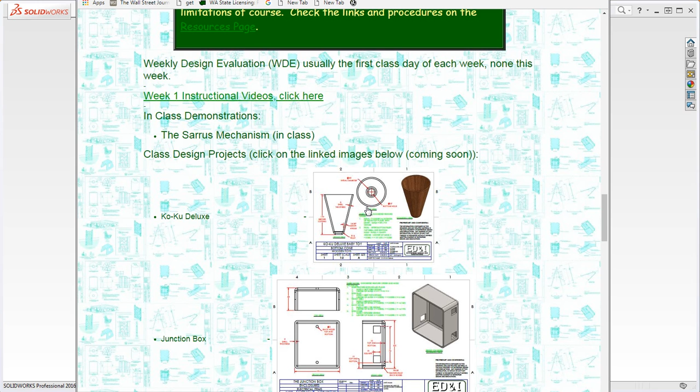Okay, so in these videos I'm going to show you how to put together some of these drawings that are available in the week 1 section of the website. So as you know, all you have to do is click on the image that represents that drawing. It's going to bring up the drawing in PDF format.

Nice thing about having the dual monitors in HT120 is it gives you the capacity to look at the drawing on one side and be able to model on the other side. It's going to be real convenient for you. So one thing you want to do with these drawings, and keep this in mind because later in the quarter you're going to be creating drawings like this, is you want to make sure it's readable and understandable and it's got all the appropriate information in there. You're going to need to have somebody build this, or in this situation, to model it.

So go ahead and read the drawing. You have the name of whatever the part's going to be. That's going to be important, and maybe some secondary names, and then maybe broad categories in here too. So we have a Ko-Ku Deluxe Baby toy in here, which is the cone. It's going to be the bottom cone. There's going to be some fun stuff that's going to go inside of that, but we're just worried about the cone right now. And sheet scale is down here too.

Sheet size is A size, but typically in the lab we're going to be creating B size paper. Tabloid size drawings, which is half size D size, which is typical engineering sizes, which is going to be 34 by 22. So we're about quarter size here in regard to paper size, but the scale is going to be 1 to 2. So kind of look this over, think about what you need to do.

What we're going to be starting with is going to be a simple cylinder that we're going to be putting a draft on in order to provide that angle to make a cone out of it. So look for that information you're going to need to start with. You're going to read this through and kind of look at things. Sheet notes are always going to be green. The text is going to be red.

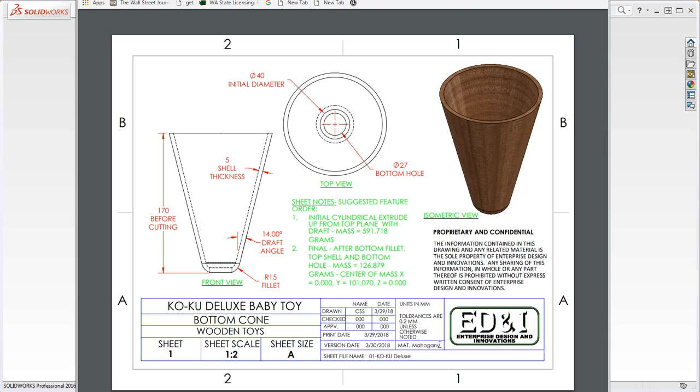Other things you're going to need to know, you're going to have to dig out of the title block. So you want to make sure you understand the units, which are in millimeters, so you're going to look at that over here. Drawn by, that's something that would come later. We'll talk about that later. Print date, version date, stuff like that. Material, this is something you're going to need to note here too. You want to make sure you put the proper material in there, otherwise you're not going to get the right weight. So we're going to put this off to the side.

We're going to begin to model it. We're going to go ahead and go to open, and we're going to go to our SolidWorks template files. So I'm going to go in here and go into the appropriate class section that we're going to be using. And we want to make sure that when we go to the class design, you have your template files in here. You're going to choose the appropriate one. So I'm going to be using not inch pound second, but millimeter gram second, ANSI-B. Not drawing, but we want to look for the part over here, which is going to be this guy down here.

So part-MMGS, we're going to go ahead and click on that and open that up. So now we have all the settings in here that we want.

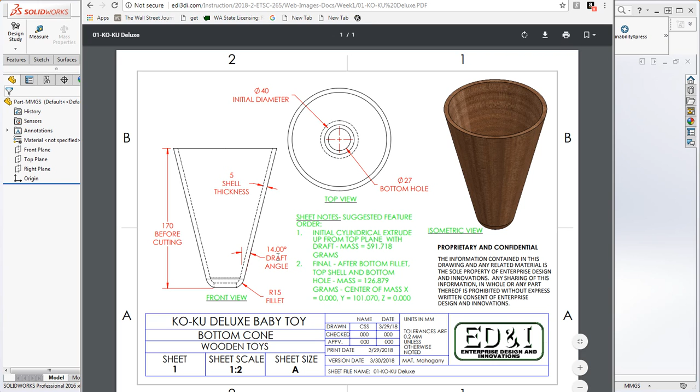We just need to begin to draw. You got to think about this and read your notes. Initial cylindrical extrude up from the top plane. So we're going to sketch in the top plane, with an initial diameter of 40 millimeters with a draft angle of 14 degrees at 170 millimeters.

So let's pull that aside. Start with the top plane. Go to sketch, go to circle. When you do that, it's going to correct itself and make itself parallel to the screen. I'm going to sketch a circle out here, and you'll notice there's a value next to the cursor. You don't have to worry about that right now, but we're going to put a dimension on there by selecting Smart Dimension up here, drop that in an arbitrary location and give it a specific value.

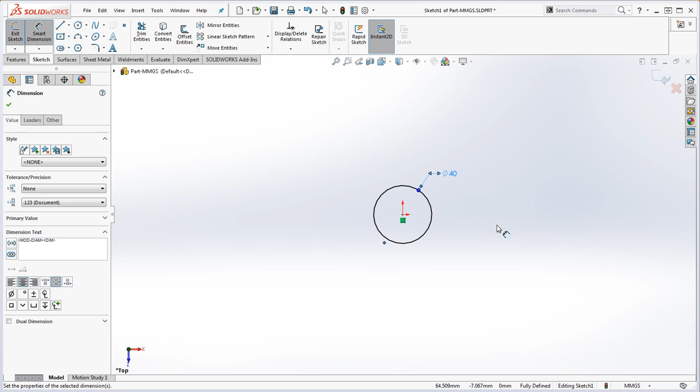Now you notice it's black. It's fully defined. Don't need to do anything further with it. And do not do this like you did in AutoCAD. Don't take that dimension and delete it, because now that circle has the capacity to move around. You don't want to do that. You're going to get some errors. So Control-Z a couple times, and now we have that initial diameter.

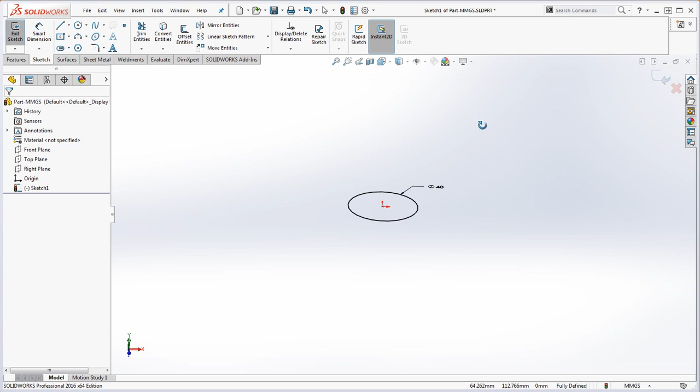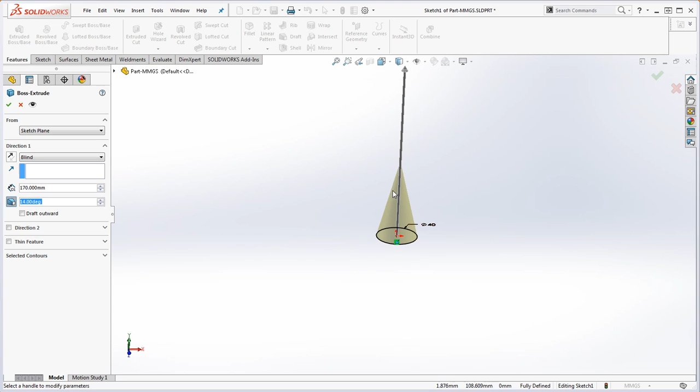So now we're going to go ahead and do an extrude. Extrude boss base, Properties Manager pops open. We're going to make that 170 millimeters, so it's going to go way, way up. Now we have a draft angle, so this is where the draft angle comes in. It's this option over here. We're going to click on that and make that 14 degrees. We did this in class, remember, kind of had a small little cone in here, but we can select draft outward and go to the green check mark. Now we have that in place.

So that's not really quite the look that we want. We want to define the material. So we're going to right click on that material, go to Edit Material. We probably should have done that first — we'll do that first next time. Because typically what you do in a Properties Manager or a Feature Manager, you start from the top, work your way down to the bottom, and if you do that, you should be able to cover everything. So we're going to be looking for woods down here. There's woods. Select Mahogany, Apply, and Close. Now we have that in place.

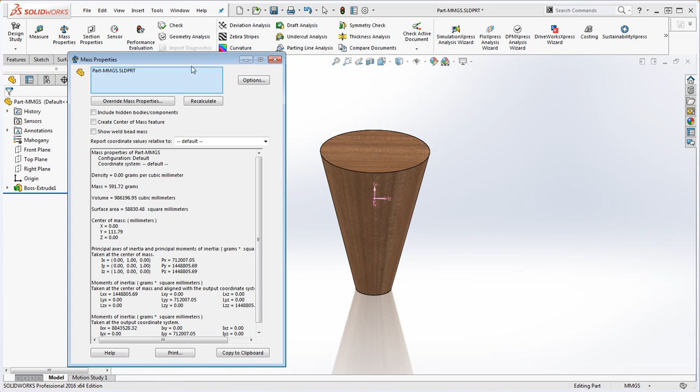So just to double check our mass properties, you want to go up here to the Evaluate tab in the Command Manager, go to Mass Properties, go to Options, Custom Settings. We want to make sure we're out to 3 decimals, and take that toggle, move that up to the highest level. That's important to do. If you have it down at the lower level, it doesn't calculate it as precisely. You're not going to get the same numbers that I got. So 3 decimal places, toggle up to the highest, go to OK, and then look at the values you have over here.

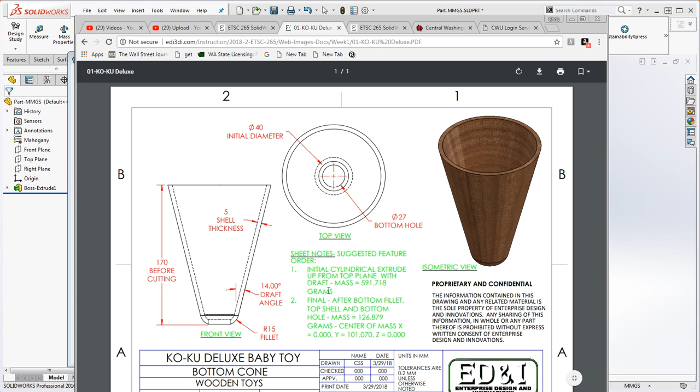591.718 grams. And according to our drawing over here, 591.718 grams. If you get that, you're all set. You're ready to go. Go to the next one.

So let's close that. Let's go to our fillet, and let's take a look at our drawing in regard to the fillet. Fillet radius is right down here. R implies radius; the diameter symbol implies diameter. It's easy to get tripped up on those. So if it's not quite a full circle, SolidWorks is always going to think radius. If it's a full circle, it's always going to think diameter. So keep that in mind, and just make sure you're watching this. That's going to be a test question. So remember, diameter is for anything circular that comes out — SolidWorks is going to label that as a diameter.

I'm going to write this down. And anything that is not quite a circle — an arc, not a circle — it's going to consider that a radius. And we'll put that as a test question. You'll see that on Monday.

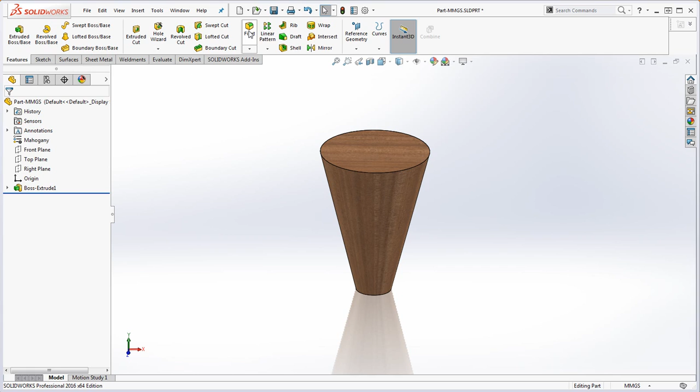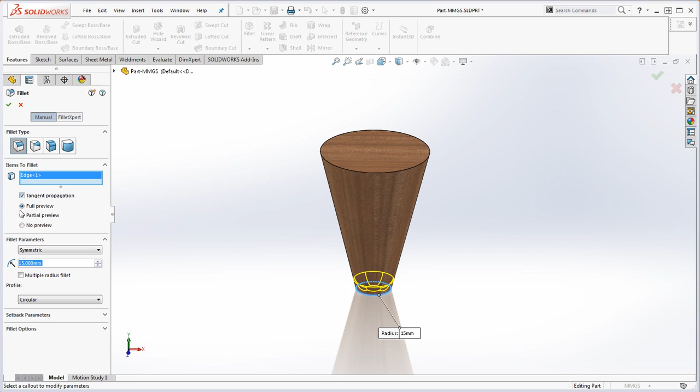Okay, so we're going to be looking for that radius on the bottom. It's going to be 15 millimeters. We're going to select the outside edge. Here's what you do: you go to the Features tab up here, go over here to Fillet. And Items to Fillet — we're not going to fill that in yet, but we're going to put in the value down here for fillet parameters. We're going to keep everything on a default setting because there's a lot of options in here. Then we're going to click on this edge down here. You notice it turns orange as a pre-selection. Click on that, you'll see it as a preview. Make sure you can see the preview by clicking that radio button in here, and you're going to see that. If you go to the green check mark, that should be ready to go.

So the next element in here is going to be the shell.

So talking about the suggested order down here, we're going to start with the basic features we did. We're going to put the fillet in there, then the top shell after the fillet, then the bottom hole, and ultimately we're going to get that mass property.

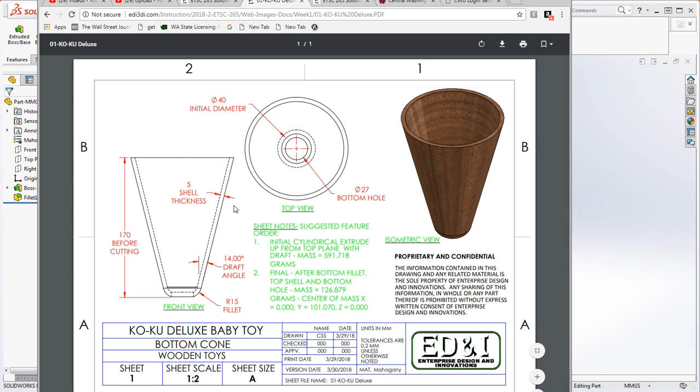So for the top shell, look at the shell thickness here, go into your drawing, take a look at what you need to do. This is the dimension we're looking at, it's going to be 5 millimeters. So now we're going to put that shell in here.

Again, we're up to features, go over here to shell. We're going to click on this surface up here and provide a shell value of 5 millimeters. So we go to the Properties Manager, 5 millimeters at the top.

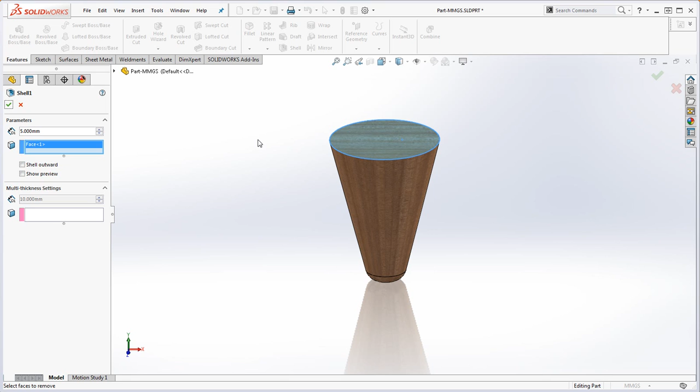Click that surface. The surface is going to be open, everything else is going to be closed and given a thickness to it, and it's going to kind of scoop it out. So a green check mark, okay, green check mark again, and now we have that shell.

Okay, the last thing we need to do is put in that hole. We're going to click on the surface for that. Before we do, let's take a look at our drawing one last time. We have this dimension down here for 27 millimeters for the bottom hole. So let's go ahead and do that.

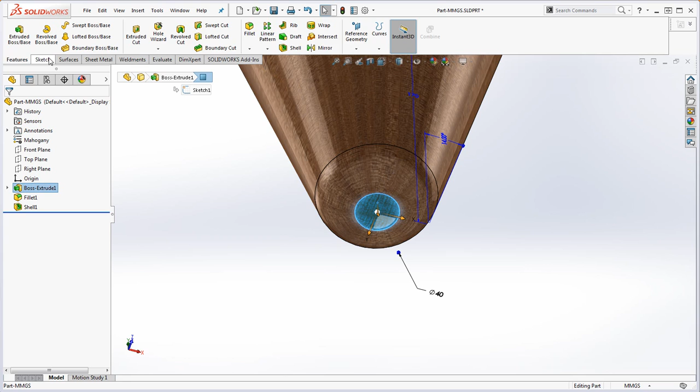We're going to click on the surface. We don't have to click on any planes now, since we already have surfaces in our model, so we're going to borrow those surfaces. We're going to go to Sketch, go to Circle, start with the origin so it stays right in the middle. If you don't do the origin, you're going to have to define that in a different way, and probably you're not going to get the right mass properties.

We're going to sketch that out, make that really big just to exaggerate it. Now we're going to put a dimension on it, make that 27. So a diameter dimension like this could be with leader lines if you like, but if you want to change that, click on that dimension, go over here to leaders, make that the diameter leader and kind of pull it off to the side.

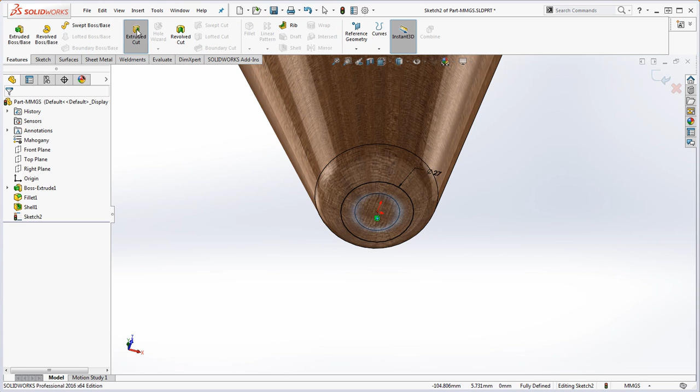Now that we've done that, if we go to features, extruded cut, I'm going to make sure you have it on the correct face. If you don't have it on the correct face, let me know and I'll show you how to change that. But we're going to make that through all, so it goes through everything in case we change the size of our model or some of the other parameters, it's always going to be through all. And go to the green check mark. Now we have that in place.

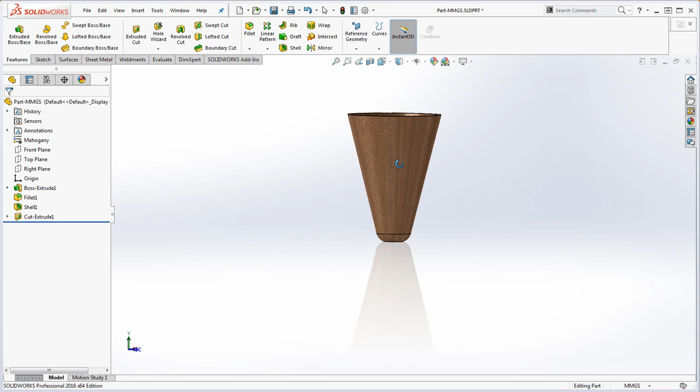We have a little hole in the bottom and a truncated cone with a fillet on the bottom and shelled on the inside. Let's see, as a capstone to this little video, let's go to mass properties and see what we got.

So we have 126.879. We don't have to go back to options, it's not going to change from what we had set before. So again, 3 decimal places, toggle up to the highest. And let's see if that's correct to our drawing. It says it should be 126.879, and that is correct.

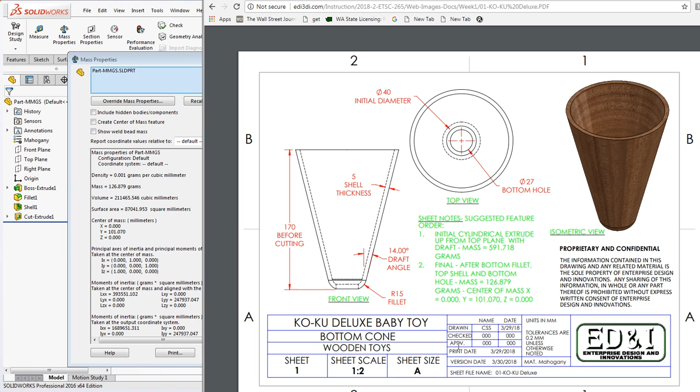And then center of mass too, if you want to check that, that should be the same. So it doesn't change in X, doesn't change in Z, but now we have an offset of 101 millimeters, 0.070. And that looks like it's the same over here. So what does that mean by the center of mass? Well, if you look at the triad down here, we build everything off the front, off the top plane, so everything off in the Z direction off to our right, the X direction off to the back. It says right in the middle of that, so it's going to have 2 zero values to it.

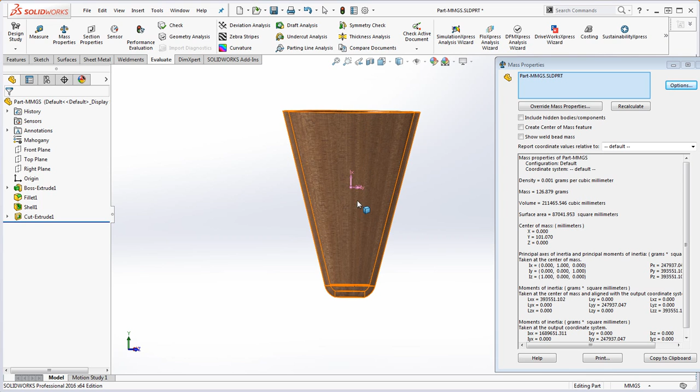The only change we have is the center of gravity, which is this symbol over here, is 101 millimeters, and a little bit more than that off the bottom, and that's where the center of mass is going to be. So it goes up 170 total, so it's a little bit more than halfway. And that kind of makes sense since you have a little bit more material up top than you do on the bottom because of the size and shape of our object, which is a truncated cone.

So that is how you build the KO-KU Deluxe Baby Toy Bottom Cone.